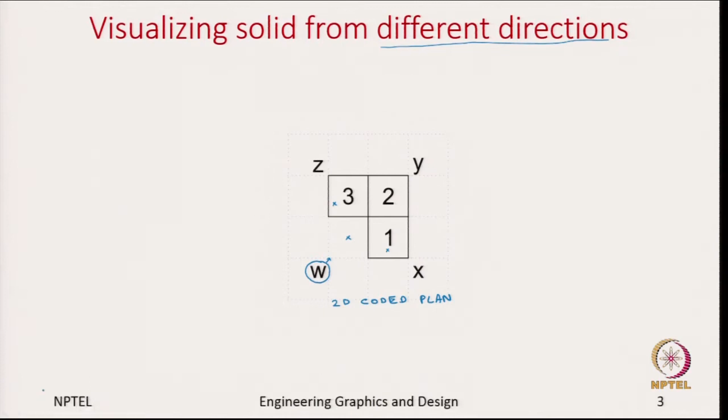Here I have used building blocks to show you how it looks like when you are looking from direction W. Here is your missing cube, and to the right you have 1 cube, and to the left we have 3 cubes stacked on top of each other, and at the rear you have 2 cubes stacked on top of each other.

Now, let us see how this looks like if you are looking from x direction. From x direction the closest one will have a height of 1, and to the right you have height of 2, while to the left there is a missing cube. So this is how it looks like: closest one you have 1 cube, to the right you have 2 cubes, and to the left we have this missing cube.

Now, once we look at from y direction, we see the closest one has 2 cubes, and to the right 3 and to the left 1, and here we see that the missing cube you can't even notice whether it is present or not in this direction.

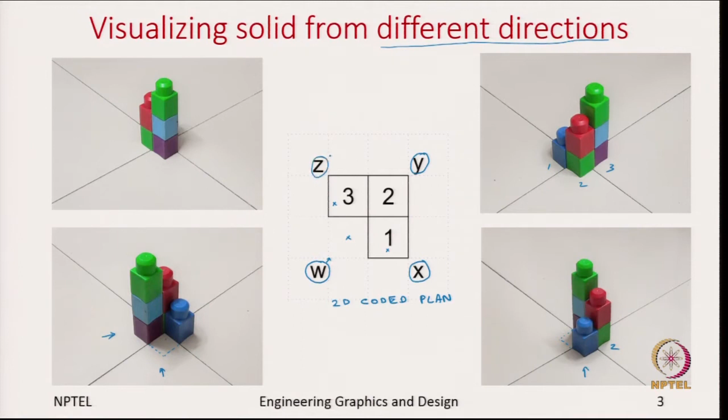And finally, from the z direction you start with 3 cubes, and this is the location for the missing cube. To the left we have 2 cubes, and we are not even able to see the single cube which is present.

So here what we are doing is the object is fixed, but the observer keeps moving. In this activity we are trying to visualize how the same object looks when you look from different directions.

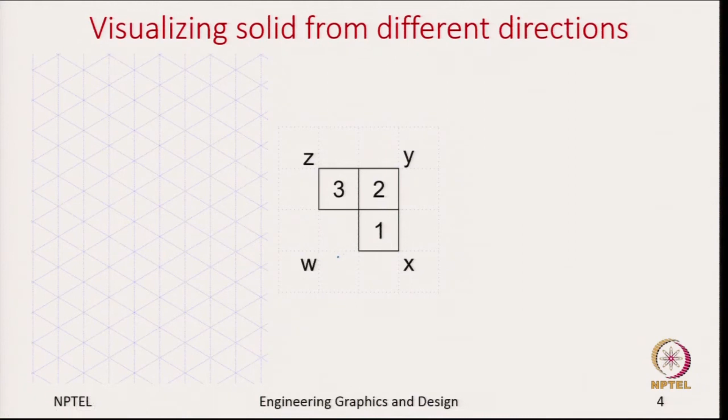Now let us try to sketch this. We know that there is a missing cube, so let us start with the right side where we have a single cube, and to the left we have 3 cubes stacked, and at behind we have these 2 cubes. If you notice we are only able to see the partial top face, because it is being blocked by this cube of 3 cubes.

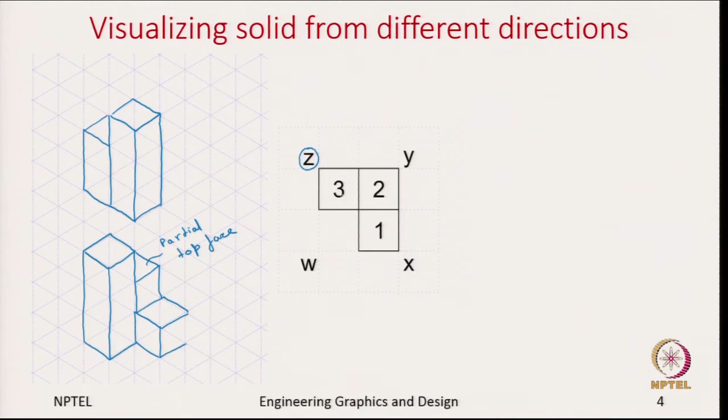Next we will look at how the same thing looks from z direction. As we said, from the z direction the closest to the observer will be these 3 cubes stacked on top of each other. To the right there is a missing cube, but to the left we have these two cubes stacked on top of each other. So we are not in a position to look at this single cube, because the 3 cubes block the view, okay, and the rest are here.

So looking from x direction we have this cube of one height closest to the observer, and looking from the y direction we have these 2 cubes closest to the observer.

I noticed that there are some extra lines in this figure, so let me fix it. Again going by the principle saying that we only show lines when two surfaces meet and they have an angle with respect to each other. Here too there is an extra line I need to remove.

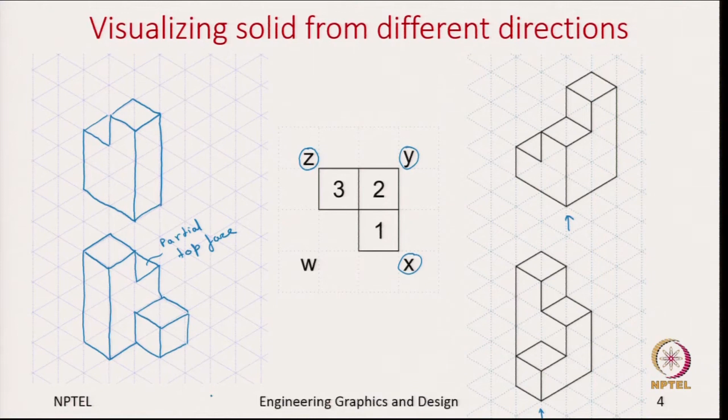So the second visualization activity we will be looking at is rotation. Previously we had the object fixed and we are looking from different directions, but now what we will have is the observer is fixed, and the object rotates.

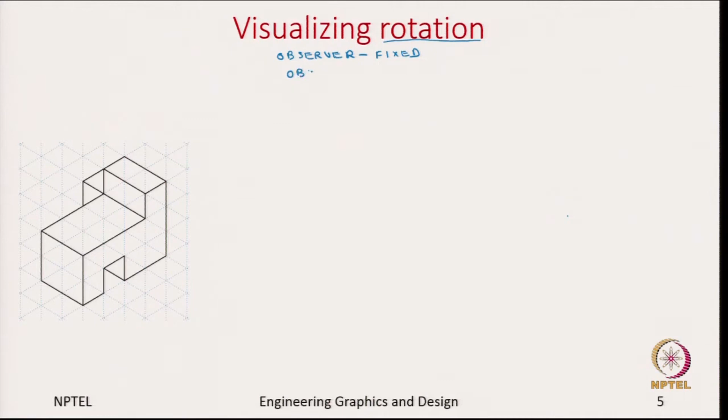So let us see. We are rotating this object about this axis shown in red here. As you can see, after rotation the view is entirely different, the isometric view is different, and which can be shown like this.

So here what we have done is we have made this rotation about one axis. Let us define that this is x axis and this is y axis, and this vertical thing where we actually rotated we will call that as the z axis. So essentially what we have done in this slide is we have rotated about z axis, and did we rotate clockwise or anti-clockwise?

So in this case have we rotated in the clockwise direction? Was it clockwise or anti-clockwise? So we have rotated anti-clockwise. This is the direction we have rotated. That needs to be shown. This is the way to represent, saying that the axis of rotation is z and the rotation is anti-clockwise.

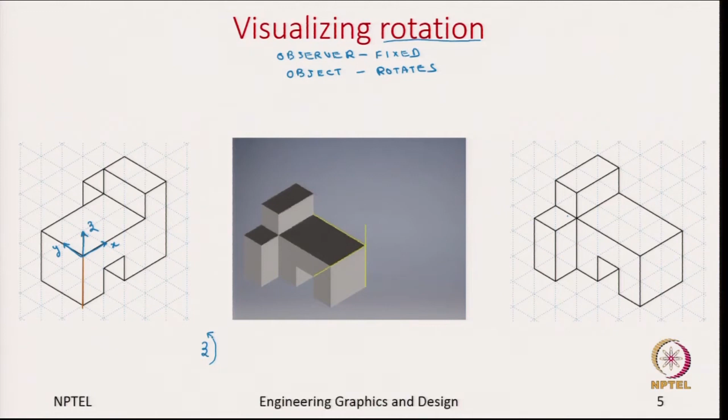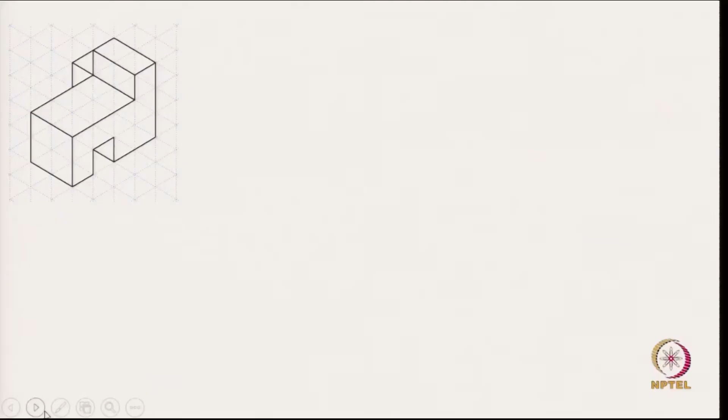So sometimes what you can do is you need not stop with one single rotation. You have the original object, and once you make one single rotation you can keep continuing this. So you can pick any other axis and continue with the rotation. Let us look at that. So like the previous example, previous slide, I rotate about this axis.

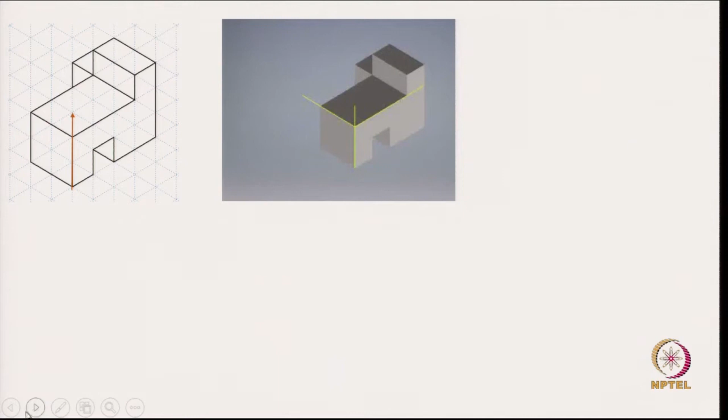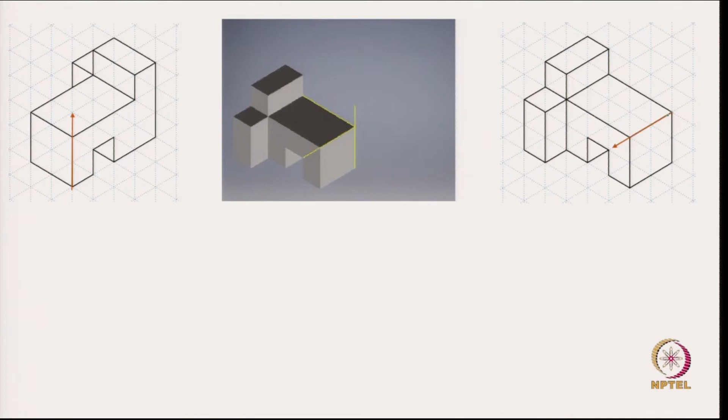After rotation, this is the isometric view, but now let us rotate about another axis. So let us pick this red shown here as the axis, and let us see how it rotates.

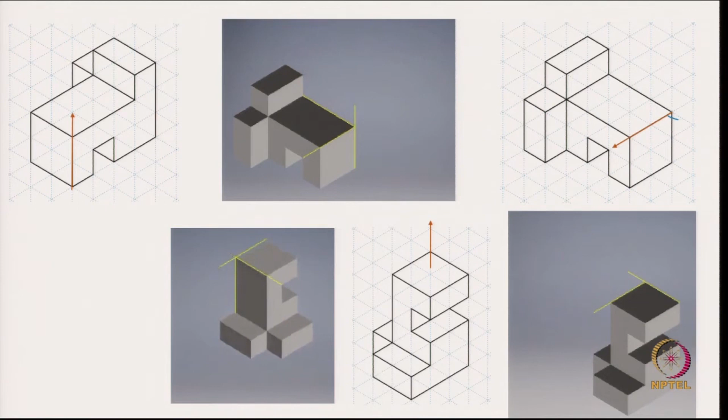This is after rotation, and now let us see how it looks in the isometric view. Like this we can continue the rotation. So I have picked another axis, the third axis, about which I want to rotate this. This video shows the rotation about the third axis, and here is the isometric view after the final rotation.

So what we notice here is we have used 3 different axes to rotate. So probably let us define the x, y, z, then we can see what names to give these axes. So let us say this is the x axis, y axis, and the z axis.

So in the first step we have rotated anti-clockwise about the z axis. Now let us see where the x, y, z axes are after rotation. After rotation, this is the x axis, this is the y axis, and this is the z axis.

So in the second rotation we are rotating about the y axis, and which direction are we rotating? Are we rotating in the anti-clockwise or clockwise direction? We are rotating again in the anti-clockwise direction.

So finally, after this rotation about the y axis, let us again sketch where our x, y and z are, because that will help us show the final rotation axis. So the axes after rotation will be: this is the z axis, this is the y axis, and the x axis is something we can't see, but let us show it here as this, since the object is blocking the x axis.

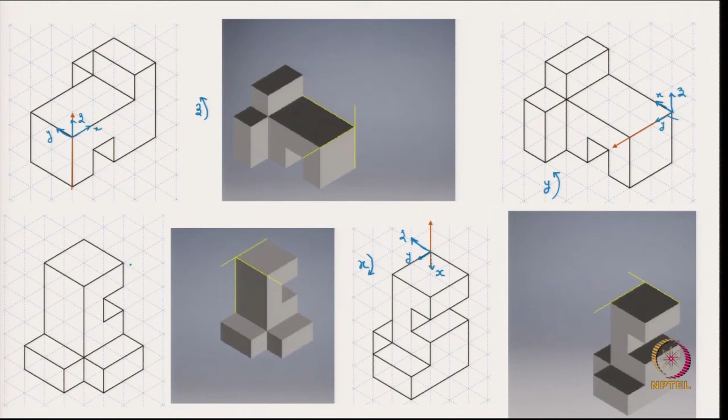So for us to show all 3 together, we can show them as: z axis anti-clockwise, y axis anti-clockwise, and x axis clockwise. This should help us do all these 3 steps one after each other.

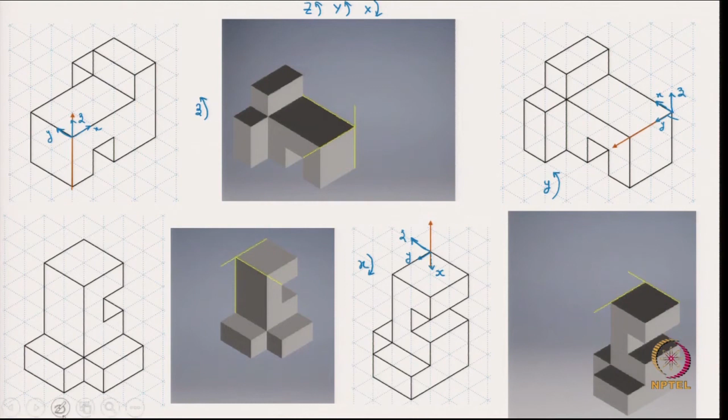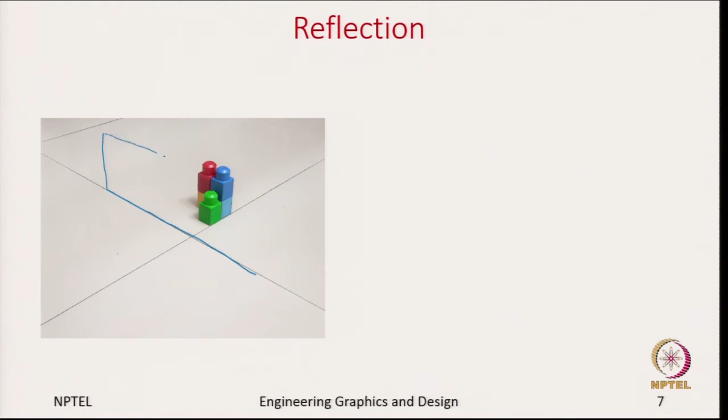Or I can give names to these axes. So let us say x, y and z. So this is what I am calling the plane of reflection, which is the xz plane.

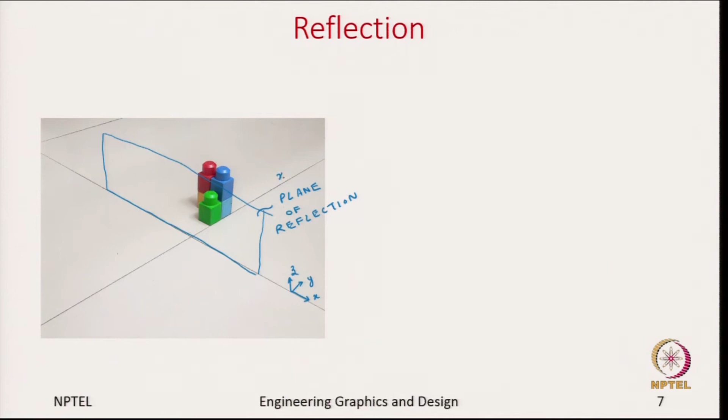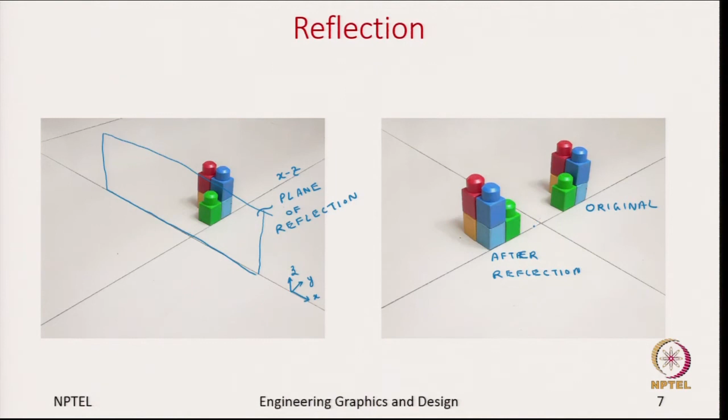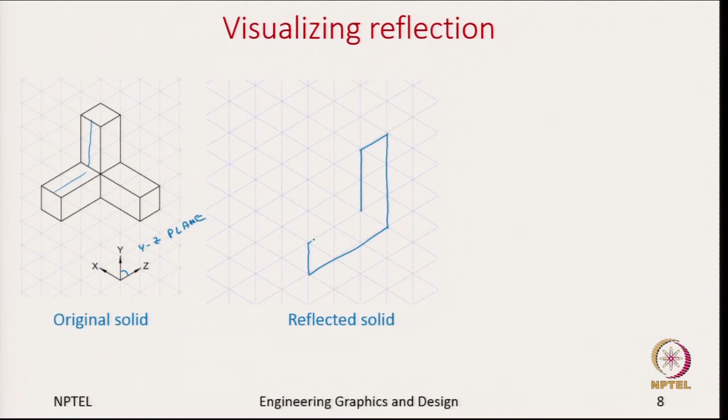Now what is remaining is this horizontal along the x axis cubes is what we need to represent. So will that be to the right of this L shape or to the left of this L shape? They will be to the left of the L shape, because that is when it becomes closer to the YZ plane, as in the original object.

So if we take this corner cube, we need to show it in 3 units. One unit is already here, so let us show the last 2 units.

So, with this we complete the isometric view after reflection. So, here it is showing both the original and the reflected solids. So, basically this forces our mind to make a mental picture of how the object looks once it is reflected about a plane.

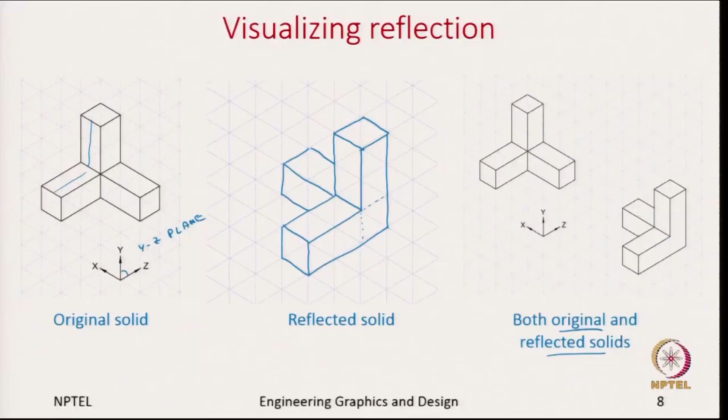So, there are other visualization activities one can do to improve the visualization skills. These include first the symmetry. So, in the previous slide we showed you reflection, right, but let us say what happens if that reflection happens in one of the planes of an object. So, let us say if we want to reflect this object about this plane, then both the original and the reflected object will be meeting each other.

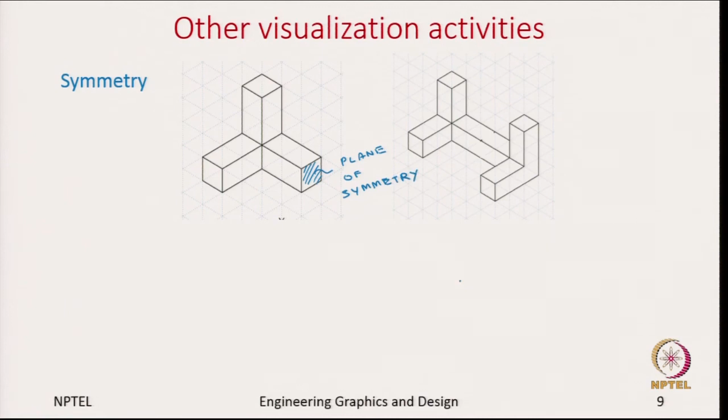So, if you join these two, then you have one single object which is symmetric about the plane of symmetry. So, this is the plane of symmetry. So, essentially what we have done is about this plane of symmetry we created one reflected object and then joined them together to make it one single object. So, you can use this plane of symmetry on any surface of this original object and then you will get a symmetric object.

Other thing you can do is one can section the object and see how it looks like at that section. So, maybe I can make a cut here and then see how it looks like. Of course, this being a simple object, I know when I make that cut it will be a simple square, but you can also choose to make a cut not at a plane which is parallel to the coordinate planes, but let us say an inclined plane. That is when it becomes a little more complex, but if you choose a cut accordingly it can be possible for you to sketch it out.

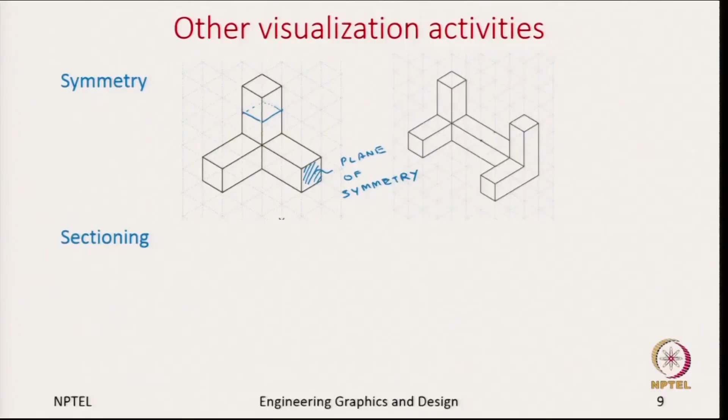One more activity you can do is try the Boolean operation. So, take two objects to start with, need not be the same objects, it could be entirely two different objects. Boolean operations are like add, subtract and intersection. So, just to review what probably you might have already known, let us say these are A and B. When you are adding, or A union B, you are considering all this area. This is A union B or add.

But let us say now you are doing subtraction of A and B and you want to do A minus B. So, which are only in A, but not in B. So, this area. And finally, intersection is the place where both A and B exist. This common area between A and B.

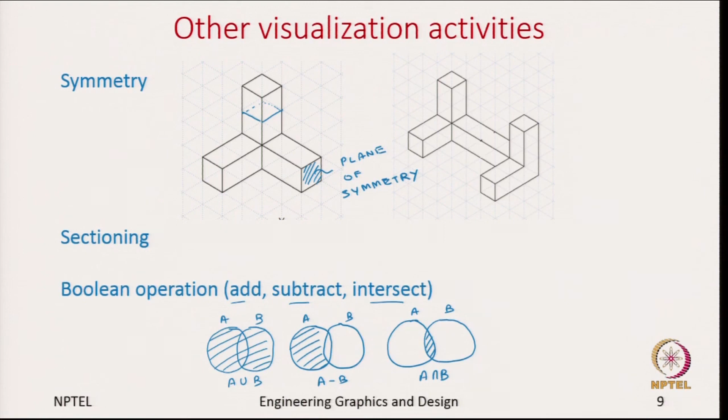So, here I am showing it with simple circles, but what I am trying to say is when two 3D objects join together like A union B, or you are trying to extract only parts of one object where the second object does not overlap, or maybe you are interested only in the overlap between these two objects. You will see later when you work with software, these are the basic operations which we use in the CAD software to build complex objects. So, we start with some basic building blocks like cubes, spheres or some very basic geometrical objects, and then we use these basic geometrical objects to develop more complex ones by using these Boolean operations like add, subtract and intersect.

So, with this we come to the end of this lecture where we summarize. So, we said that visualization is a very useful tool an engineer or a technologist needs in the design process. So, these are the various activities we have covered here, saying that if you look from different corners, will you be able to imagine this object. And then we said if we make the observer fixed, but the object is rotating, how do you visualize that object. And similarly, reflection and symmetry are when you have a plane of symmetry or a plane of reflection, how does the new object look like.

So, we also said we can use something like sectioning as a visualization tool, saying that if you take any object and cut it, will you be able to imagine how it looks like after the cut and before the cut. And finally, you can take two different objects and either add them together or subtract or intersect to make up new objects. We said that the Boolean operations are the common technique we use in the CAD software to develop some complex objects.